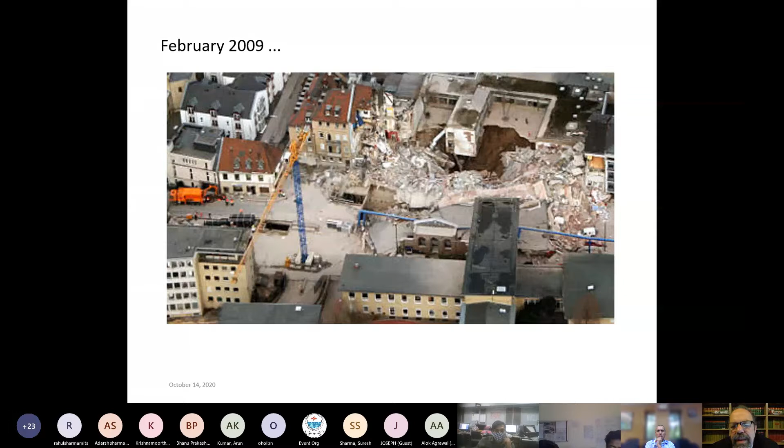It goes terribly wrong. And do not think and do not believe and never be even half persuaded to think that it only occurs in particular countries or somewhere else. It occurs everywhere. This is an image from Germany, February 2009. People died here, collapse. This is in Cologne. I'm not sure if any of you have been to Cologne, a beautiful city, and collapse.

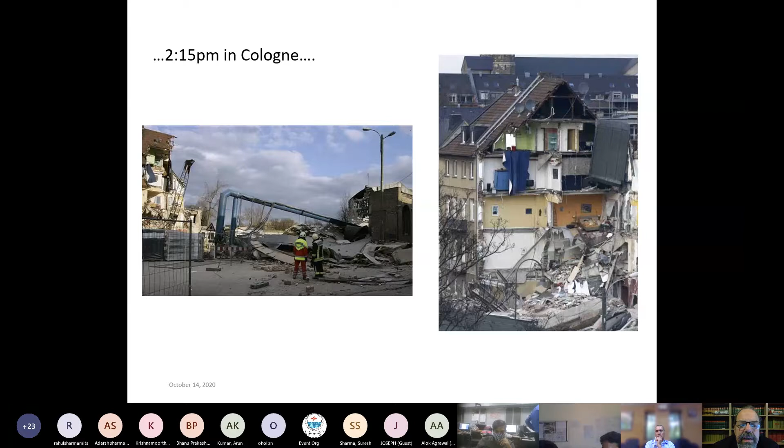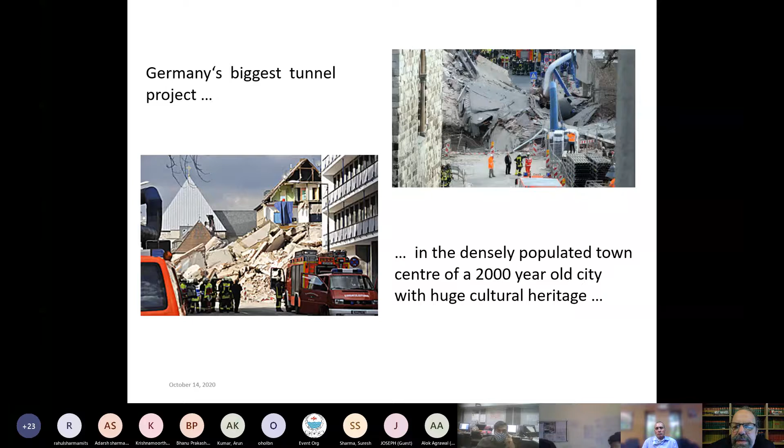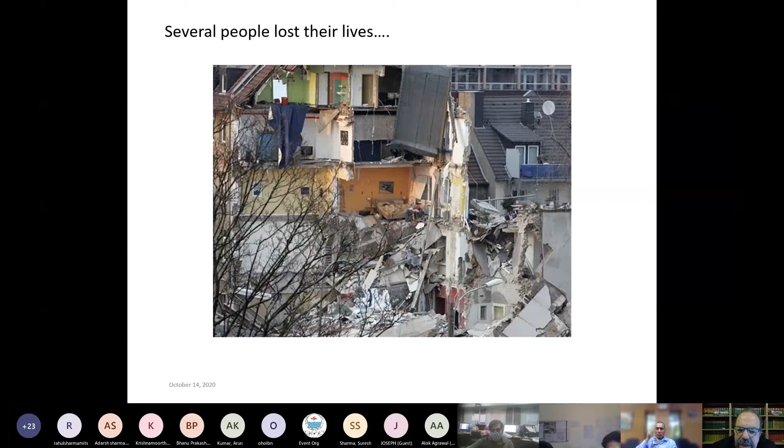It was Germany's biggest tunnel project. And in the middle of the city, in the most special part of the city, with huge cultural heritage, it collapsed and killed a whole lot of people. And this is just some images showing the houses ripped in half. This is in Germany. I'm not sure what your experience is when working with German companies or German people, but you could be forgiven, or at least I could be forgiven, for thinking nothing bad happened there. It happens everywhere. Predicting the future is no easy task.

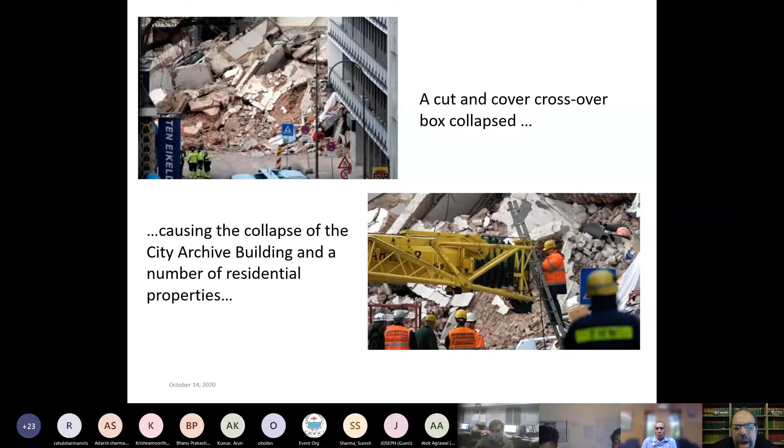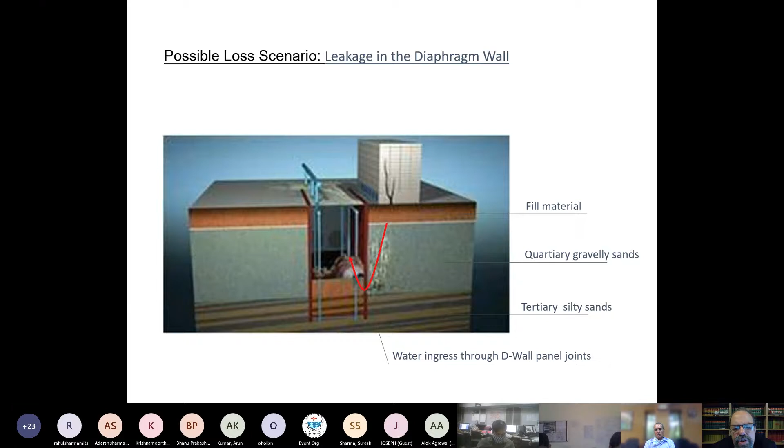It was just a cut and cover crossover box that collapsed. The collapse of this particular comparatively simple structure caused, of course, the collapse of the buildings above. And what was the reason for the collapse? Well, for those of you who work in the field, usually somehow involved, not always, given you've got the Himalayas in your country, you get some other big forces as well, but often, water and silt, some sort of discontinuity issue in the rock mass, some sort of dissolution process, whatever it might be, caught them out here in Germany, causing everything to collapse.

It's one of the biggest liability losses in the history of Germany at around 90 million euros. And the client, the company - here's another important message - the client had a 30-year plus loss-free track record. They were a top-tier grade A company, Germany's top civil contractors.

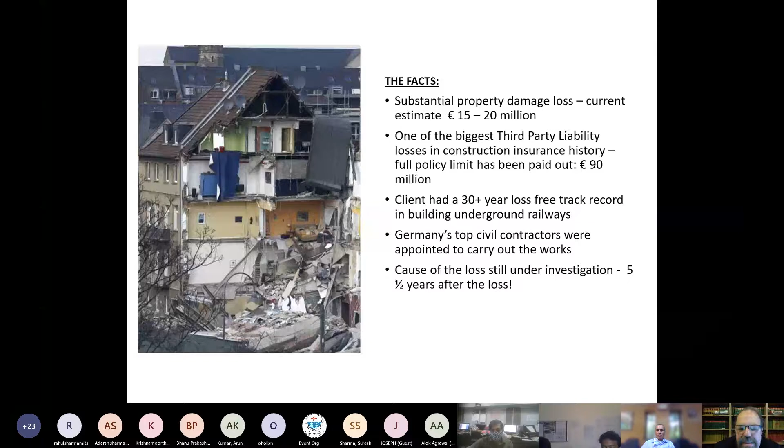My point is, it can happen to anyone. This predicting the future, this doing our job as engineers, discharging our special skills, understanding the risks and managing them - it's predicting the future, and it's not easy. Never easy. Just because it worked yesterday doesn't mean it's going to work tomorrow.

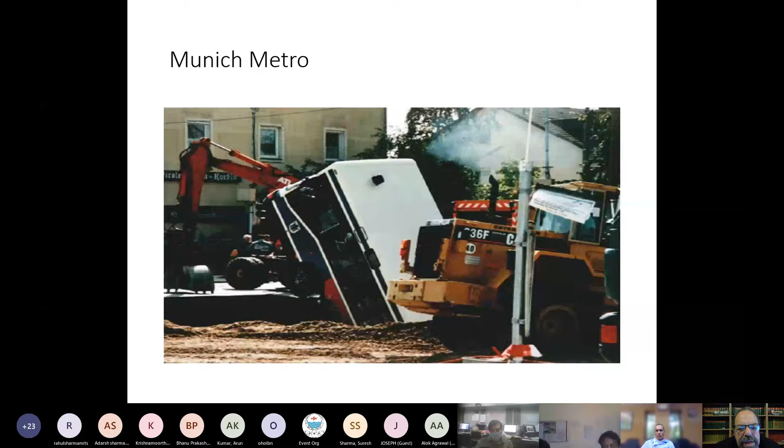Here's another one in Munich. Or in Cologne - another collapse in Germany. Not easy. Across to the United Kingdom with the Heathrow Airport collapse. Again, our colonial masters in the United Kingdom - you could be forgiven when you talk to them, you'd imagine that everything they do is perfect. Newsflash, it's not. Just like us, no matter where we are in the world, our job is hard because we're predicting the future. We've got limited resources. We have to deliver the projects. The risks are complex. We can only do our best, and we're only human.

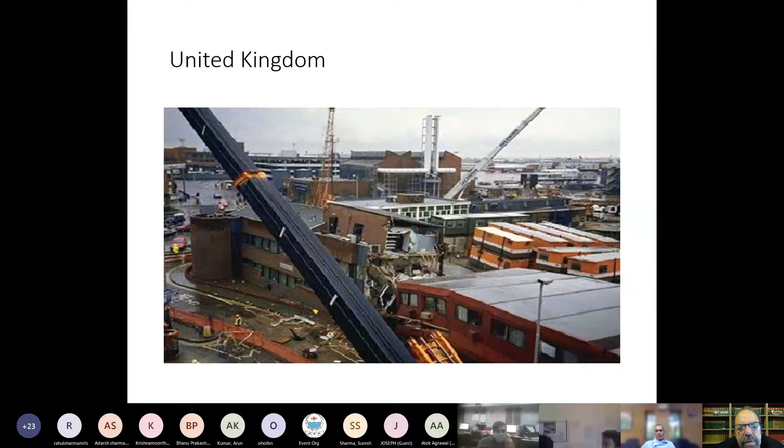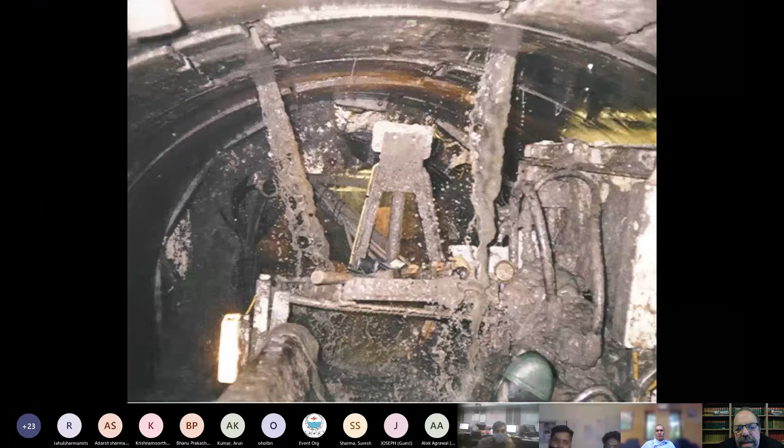My point is, it happens everywhere. South Korea, China.

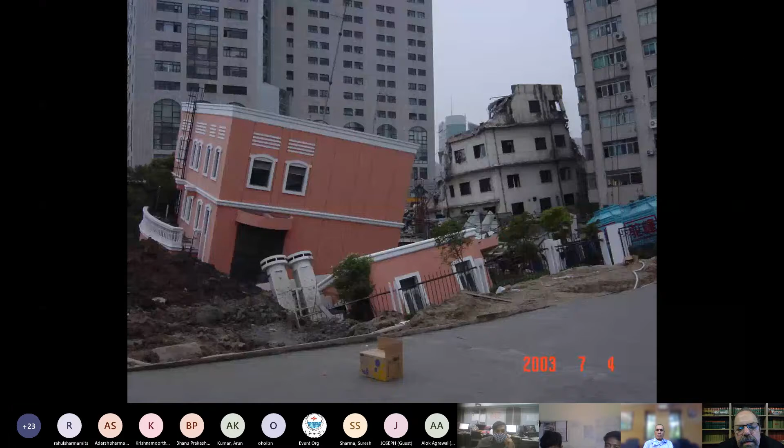Okay, so that's all very nice. That stuff's all in the public domain. And by this stage, you're either interested or you're not interested. You might be thinking, I'm not really interested. If you're not interested, listen a little closer, because you should be interested. And the fact that you're online tells me that you're a professional. I'm trying to tell you about the fallibility of us as people, as engineers doing our job. I'm trying to share with you how things can go wrong so easily.

And it's important to me to share it because I investigate disasters. Let me share with you a real disaster - no names, no dates, but a real disaster.

So here's my investigation team, and I have two secret weapons in this investigation team. I have two women. Now, why do I have two women in my investigation team? I have two women because I need information, and I need information from men. Often I find that men are less scared of talking to women, and women have a better manner about them to talk to men who, for example, have been seriously hurt, or someone's just been killed or whatever. I really, really appreciate the manner of a woman. If that's sexist, I stand accused, I'm sorry, but it's been my experience in investigation.

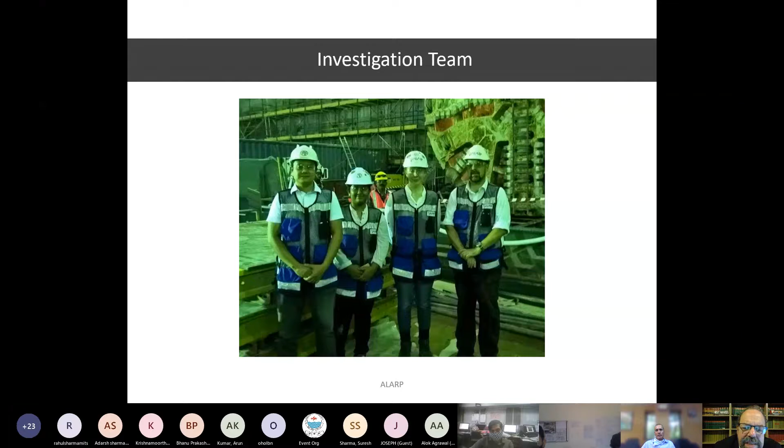So I've also got different nationalities in my team so that I can be culturally sensitive. Why would I do that? My friends, ladies and gentlemen, the people who are often doing the hardest and highest risk work in our projects throughout the world are often not from the countries in which you're working. And so in this particular case, which I can't mention where it is, I was dealing with miners from Bangladesh, from India, from the Philippines, and from Africa. And so I had to be sensitive to the cultural aspects when talking to them.

When I'm investigating death - never in our professional context, never, ever, ever have I found that someone has intended to kill somebody else. So I'm speaking to you now, it's like a lawyer - I'm a lawyer unplugged, okay? When I'm doing an investigation, I know there's a couple of exceptions where someone's done something bad and they've been killed in a tunnel, like having a piece of equipment squash them against the wall or something like that. But that's not what I'm talking about. I'm talking catastrophic failure in an underground context.

It's never intentional. So if it's not intentional, what is it that I'm looking for? I'm looking carefully for the evidence of the professional conduct. I'm looking for who did what and why. I'm trying to find out who's the boss and who's doing what they're told. Because newsflash number two: mostly the sort of people that are doing the construction work here will do exactly what they're told because they're desperate for work. And in my experience, the responsibility tends to lie with the supervisors and the engineers above them.

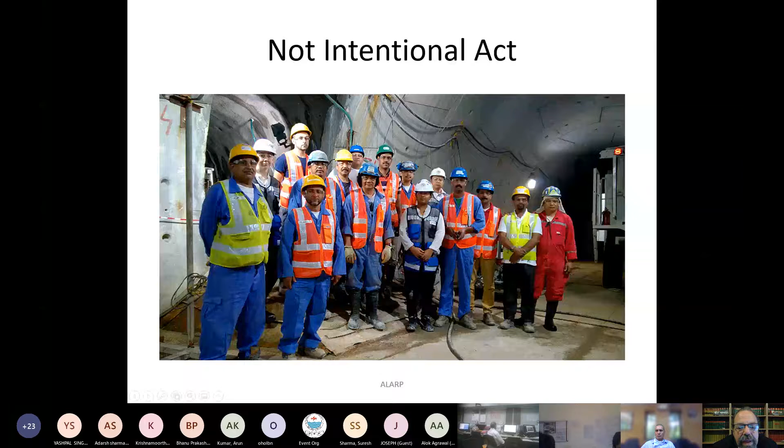When I'm investigating, one of the first things I do is try and find out how this particular construction was meant to be undertaken. The method statement, call it whatever you like in whatever country you're in. I'm assuming that for each of you listening, if you haven't worked in other countries, you will one day, and the words might change, but inevitably there'll be a document, a piece of paper, something which defines how a job should actually be done.

When I investigated this disaster, remember this isn't theoretical, what I'm telling you about is real. This isn't some hypothetical from a university exam, this is the real deal. When I investigated this particular incident that resulted in deaths, the method statement contemplated bad ground. It contemplated injection grouting, it contemplated rock bolts, and it contemplated 1 metre excavation drives.

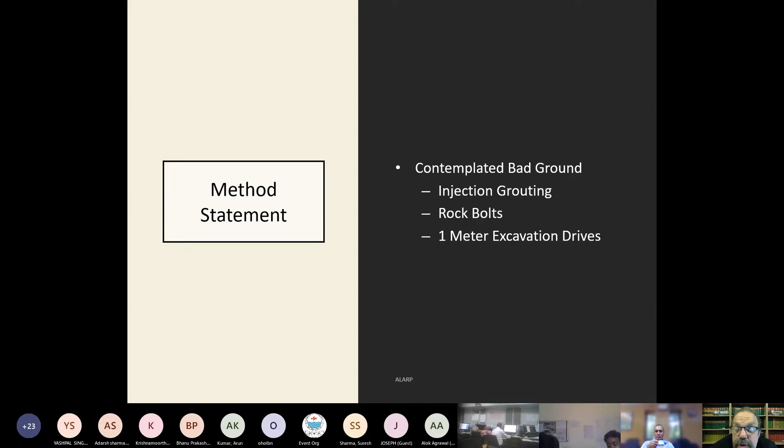So as part of my investigation with my lawyer's hat on, investigating a real disaster, I now had in one hand a message from the engineers who were responsible for drawing the method statement, presumably the design engineers somewhere behind them. And there were key risk management procedures as well.

In the method statement, so in the documentation that was defining how to build this tunnel, in relation to this, which was cross passages, my favourite, I love cross passages because they're so much more difficult than the main drives. The method statement for the cross passages talked about temporary support, and it said specifically, during excavation, access of workers below unsupported rock is strictly forbidden. That's what the paperwork says.

I'll say it again. In the paperwork that has come down the chain of command from the designers, in the paperwork which is based upon the geotechnical investigation, plus the findings from other tunnels, the other drives as they've gone past this location - this is revision 4 - during excavation, access of workers below unsupported rock is strictly forbidden.

It's a message from the engineers about foreseeing the future. It's a message about the future where they're anticipating something going wrong and the potential for injury. The future was partly foreseen. They knew this was dangerous. The ground in this particular location, the designers knew was poor.

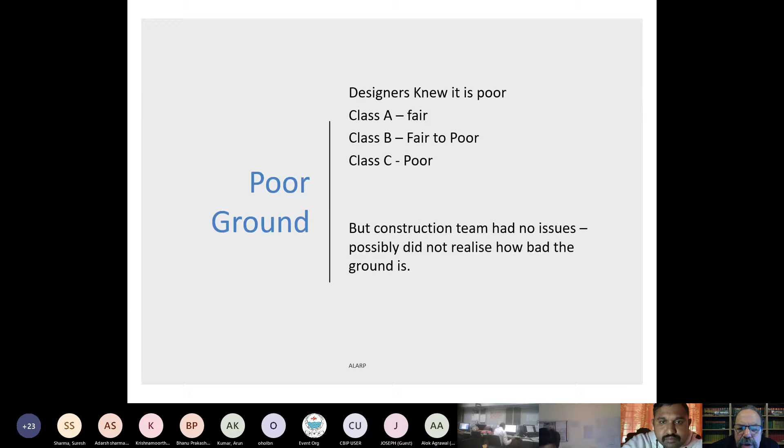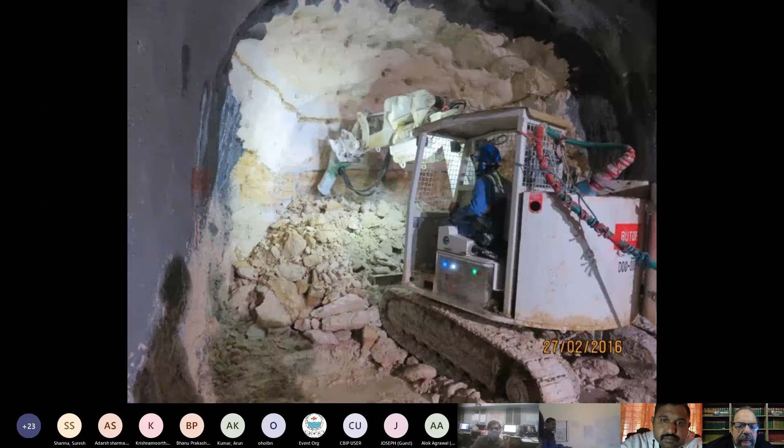Here's another picture of the excavation, showing workers excavating, doing a drive, and then they'll put in the support. Nothing remarkable about that, except you see how this layer, if you go back to your geology, the bedding of that is almost parallel to, entirely horizontal with, this drive. It's running exactly along the line of this cross passage. It couldn't be in any worse position if there was such a discontinuity immediately above the crown.

It's called coffin cover in the trade, coffin cover, because they say the lid of your coffin is just sitting above you.

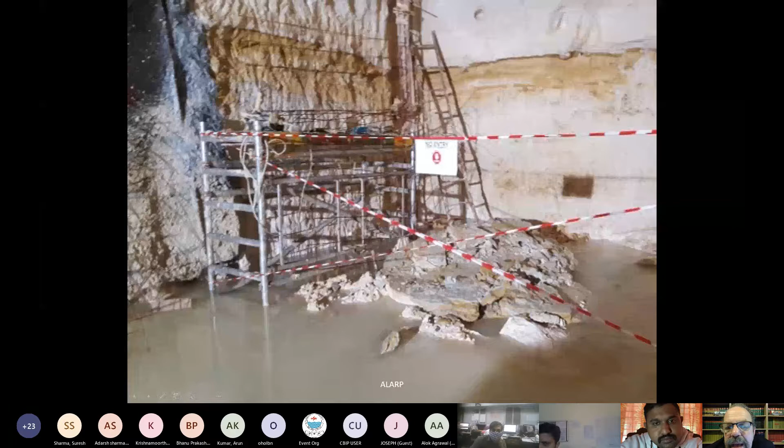And then it collapsed. In this photograph, what you can see is the roof that collapsed. The very, very fine layer of discontinuity here on top of this rather planar surface. And the people who were killed were underneath this. It's just that simple.

Rule number 5: our heads don't do well even with a small rock. We're not very strong. We're not built to have big rocks fall on us, and you just die if you're lucky.

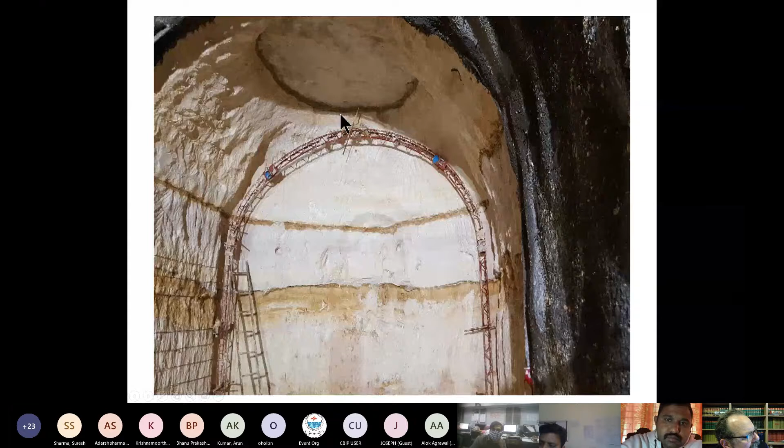And now, when we look up, there's the coffin cover. That little thin line is the bedding plane for a similar discontinuity in the rock, which is just running along the crown. That whole section of roof has just fallen out as one piece and killed the people who were working below.

And there's further evidence here about what happened. If we look carefully, here's some evidence. In the method statement, it was meant to be a 1 metre drive and then put in the support. But look, it's more than 1 metre. You can see the lattice girder here that's being put in place.

You're not meant to put the lattice girder at the end and work your way back. You're meant to put the lattice girder near where you've already provided the support, and work your way in. Why? So this doesn't happen, so you don't have the roof fall on your head and kill you.

This underground prediction of the future is a serious matter. Yet for me as an investigator, I know that the designer knew. I know that the method statement contemplated it, but there's a disconnection right here. At the cross passage, people like you, like me, could have been any one of us, for whatever reason, we weren't prepared to do our job properly and actually follow the procedure that we meant to.

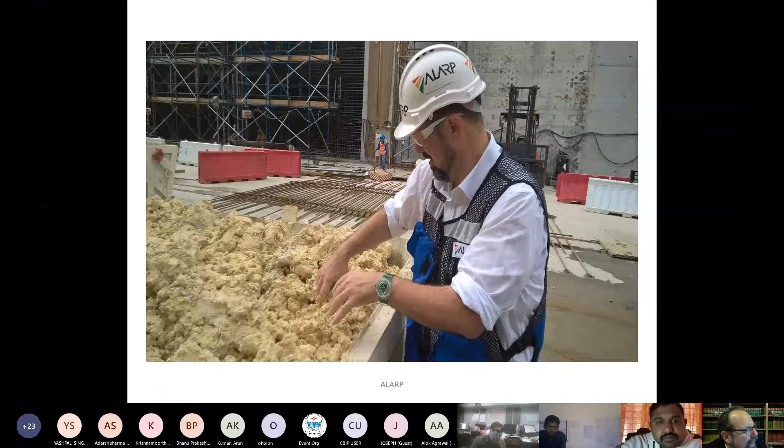And I engaged with the design team, and the design team flew in, and they were terrific. As I mentioned before, the design team knew exactly why the method statement was as it was. The design team contemplated bad ground, but the translation of that method statement into how the actual works were conducted was perverted because of the speed.

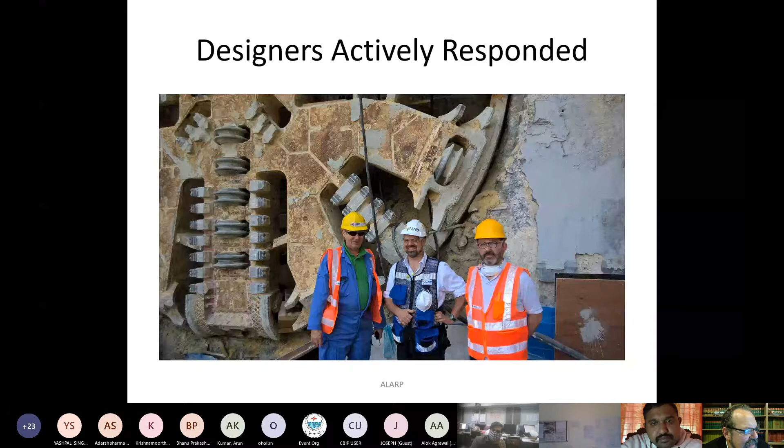I also went and looked at other sections of the completed tunnel for evidence about groundwater ingress - anything like a forensic investigation. I wasn't just content to look in the cross passage. I wanted to understand the context. I wanted to understand the ground disturbances the TBMs had passed on either side of this particular location of the deaths. I wanted to understand what knowledge had been gained when the TBMs passed and how that knowledge had been used.

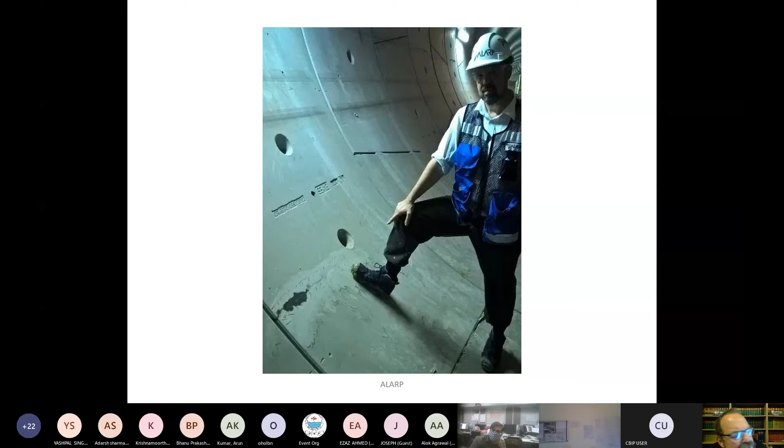And I also wanted to understand the miners. I wanted to understand their state of mind - what are these people like? Generally miners, in my experience, are risk averse, but they do what they're told because they've got to feed their family.

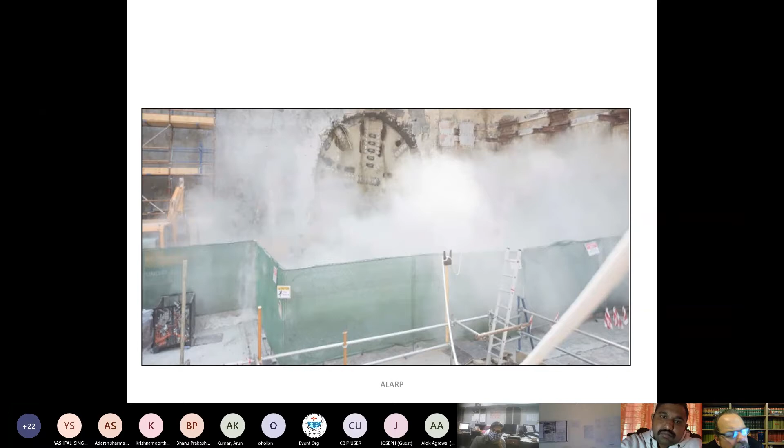And I also went and investigated other things. I just wanted to understand what entirely was going on, not just what might be investigated from a textbook. I discovered something interesting - that at almost exactly the time the roof collapsed, there was a breakthrough at a station box just a few hundred meters away. Now why is that important? My friends, as technical people, if you've ever been to a tunnel breakthrough, have you ever felt the boom? Have you ever felt the ground move when that big face of rock falls off?

Lesson number 6: do not underestimate the power of your eyes, your ears, and every other sense God has given you. It's nice to have a tertiary education, but be wide open to information of whatever sort and be prepared to think laterally. My friends, here is a potential trigger - in substance, a seismic trigger - for an event down in that cross passage. And when I linked up the times of the collapse with the time of this breakthrough, they aligned.

But I did more. I got up on top of buildings and looked down upon the site, looked down upon the area. The actual deaths occurred somewhere down under here. And I just wanted to have a look at what was above. Now why would I do that?

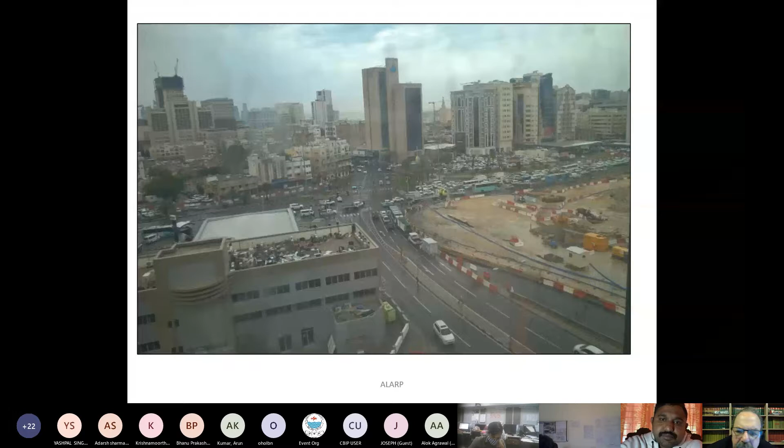And what did I find when I looked down from above? I found another TBM. So not only have I found, coincident with the falling of the roof killing the people, the breakthrough in the station box - I also discovered another little TBM, nothing to do with the metro in which the collapse occurred.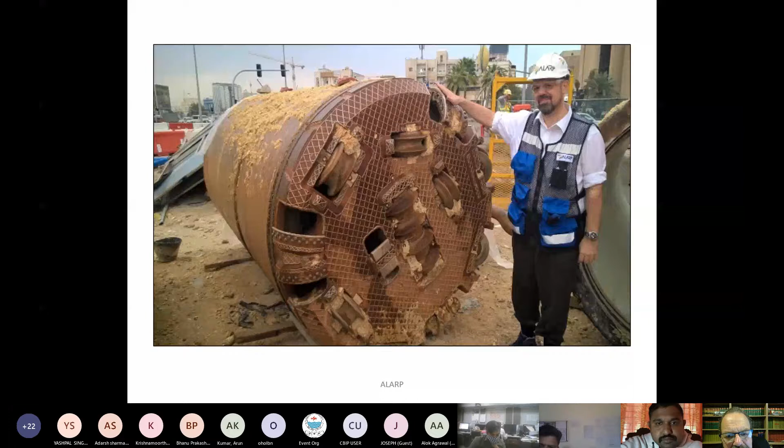And so then I tried to work out the comparative alignments between the metro, the cross passages, and this little TBM that went across here. And it turned out, as luck would have it, that at about exactly the same time there was a tunnel breakthrough in the station box, and at exactly the same time the roof collapsed, a little tunnel boring machine was crossing over the alignment of the cross passage and the main metro tunnels.

So I've got, on the one hand, just a simple method statement, but now what I'm discovering is a lack of coordination between a whole lot of different activity. I've got a completely different company doing a completely different project with a completely different TBM right above my cross passage. I've got a breakthrough in a station box just a few hundred meters away. I've got disturbed ground because I've had a tunnel boring machine do two passes - one pass for one tunnel, one for the other.

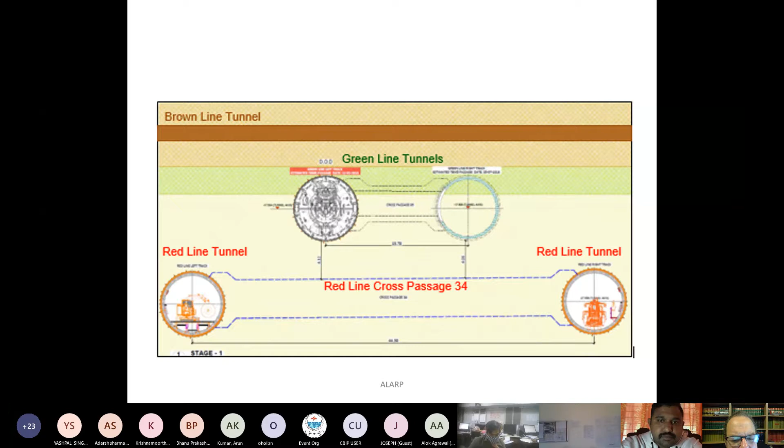As engineers, as professional people, as citizens, as decent human beings, our duty to predict the future is more than just out of a textbook. You have to be open to context, eyes open, ears open. You see the convergence of events which is occurring.

Here's one of my team talking to one of the people who wasn't killed, and coincidentally both Indian, and they were able to communicate in Hindi. The local languages were different, but they used Hindi. This particular man only told my engineer Dina what was going on, I think, because of her gentle approach with him. He was so scared, so scared that he was going to lose his job.

And what was he telling her? He was telling her that he just did what he was told. He was telling her that other people had been injured, but that they'd been taken away and hidden because they didn't want to get into trouble. He was telling her everything, and he was just happy to tell her that story.

Just as a little aside, notice there's no textbook, no pen, no piece of paper. My friends, in the end, we're people. Do not underestimate the importance of just being a decent human being when talking to another. Yes, we're engineers, yes we're technical people, but this man had lost colleagues and friends who'd been killed and was terribly scared. Just talking, making them feel comfortable is enormously valuable.

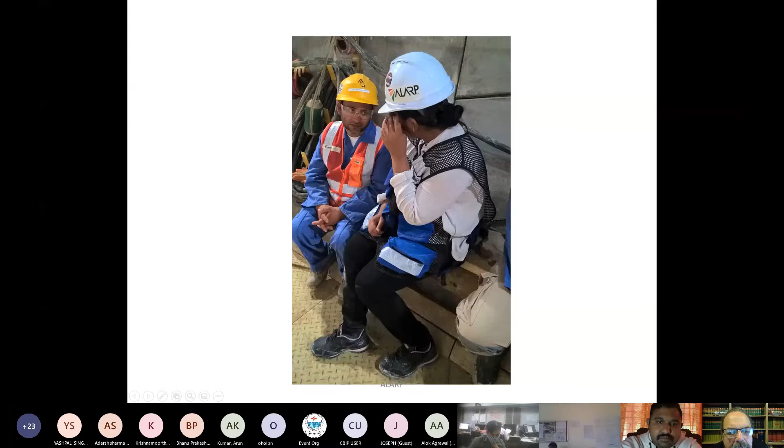So what do I do? I head off to the core shed because I've got a few ideas now about what's going on. I get the cores, which were taken very close to where this cross passage collapsed. And what do I find? I find another thin layer of incompetent material exactly above the crown of the cross passage.

I'm going to change my numbering system now. Lesson A: geotech information should be used. The project knew that there was a weak layer immediately above the crown of this tunnel. It just never got communicated down the line.

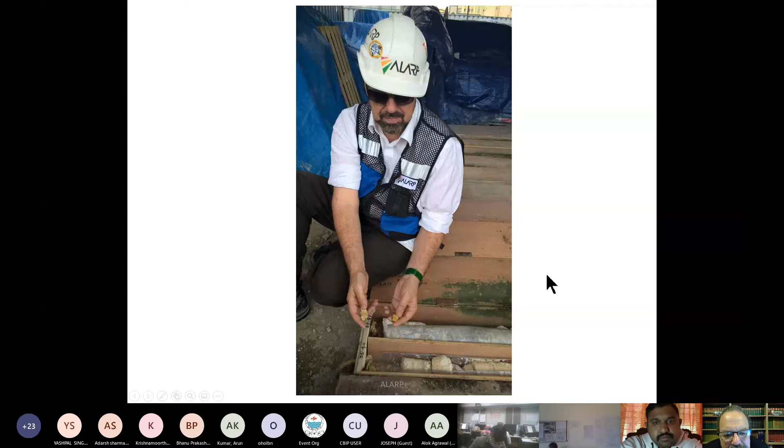And this is me looking at the evidence of it. I found it was open to anyone to find. It's not because I'm a genius. I just had a look.

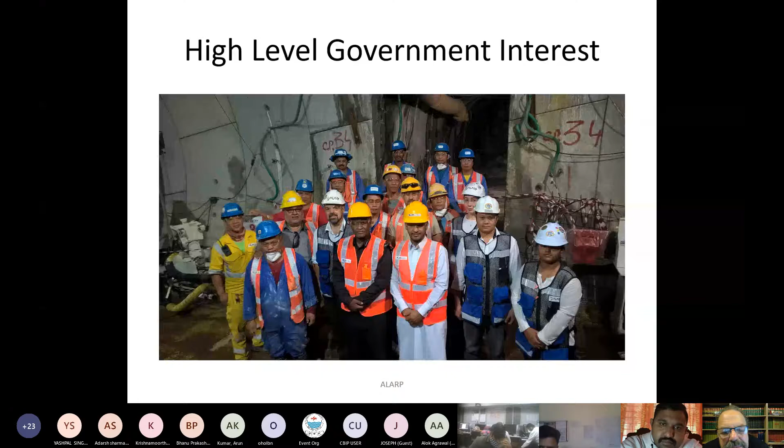Of course, these sorts of events create a whole lot of government interest. And again, if you're working overseas, do not underestimate when something happens and people are killed. You've got the very real chance of ending up in prison. So this is a very serious matter, and this is just part of the investigation team, the government, what have you, doing the investigation. We do lots of inspections and all those sorts of sensible things.

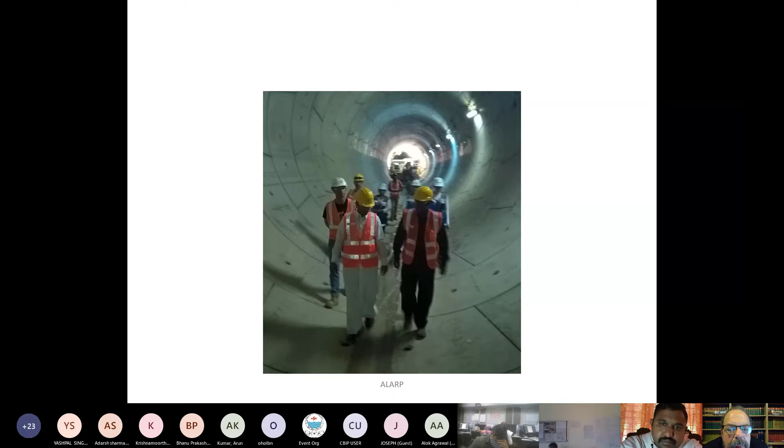The records. When I examine the records, I find this. I find that the project knew about the weathered nature of the rock, and the project knew about the weakness, and it was all documented. And that's why the method statement seemed conservative. To the people in the field, the 1 metre drive seemed outrageously conservative. But it was correct, because the rock was so bad, even though it was called Class A, B and C.

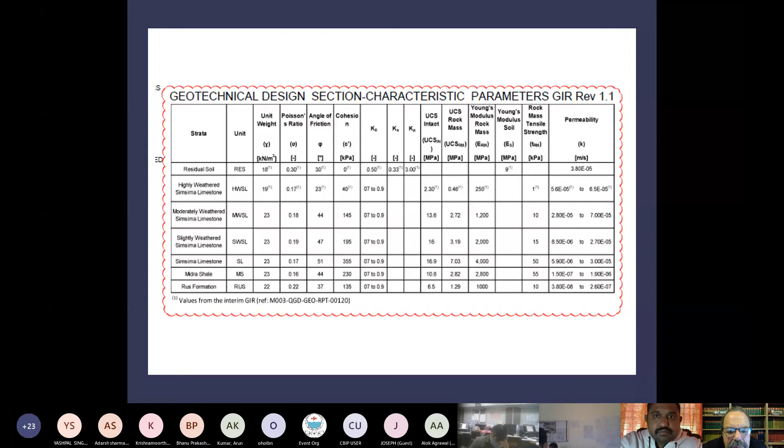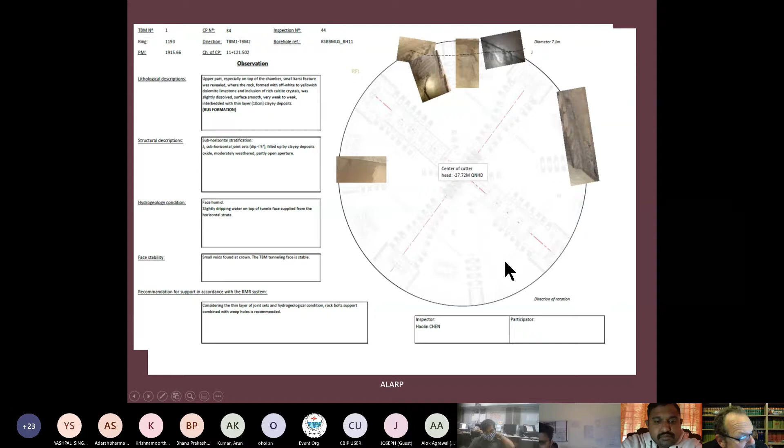When I looked deeper into the reports from the design team, they had words like, considering the thin layer of joint sets and hydrogeological condition, rock bolt support combined with weep holes is recommended. They knew that this was difficult ground conditions. The cross passage had no special instructions for the team.

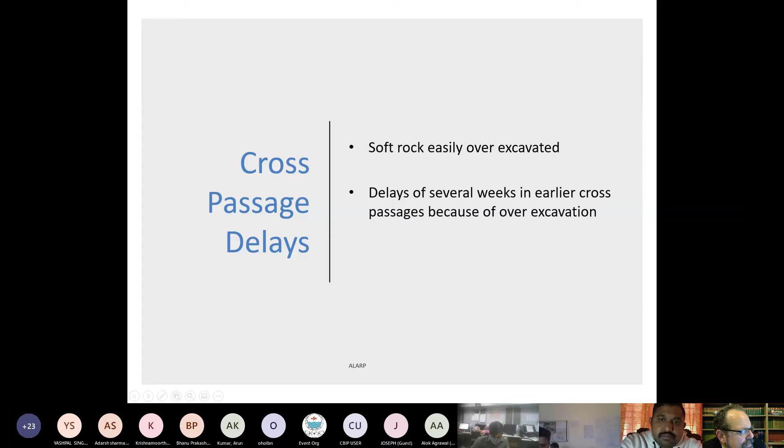We know, and I'm sure you know from your work as well, that soft rock is easily over-excavated, and from a stability point of view, over-excavation's a bad thing. We want those nice arches, we want nice, neat cross passages. And there was a lot of pressure in this project to get things done because of over-excavation and the complexities that it caused. And this is just another close-up of some of the rock.

So in this investigation, what I found was the project had imposed absolute prohibition on working under unsupported rock. Clearly, the designers had made it clear, do not work under unsupported rock. The method statements contemplated poor quality rock and localised rock bolting, grouting, lattice girders, water, hydrogeological relief, what have you.

The local cross passage team were overconfident and under-expert. Overconfident, under-expert. The poor quality of the rock wasn't understood by the cross passage team. They weren't wise. The miners knew because they're miners, but the supervisors who were directing them were not experienced in underground construction.

Production rates were overwhelmed and overwhelming the method statements. There was such a drive for production that the method statements were being ignored. And the wet weak rock above the crown wasn't communicated, even though it was identified in the logs, even though it was identified during the intervention in the tunnel boring machine. My conclusion was that the procedures were not followed on purpose.

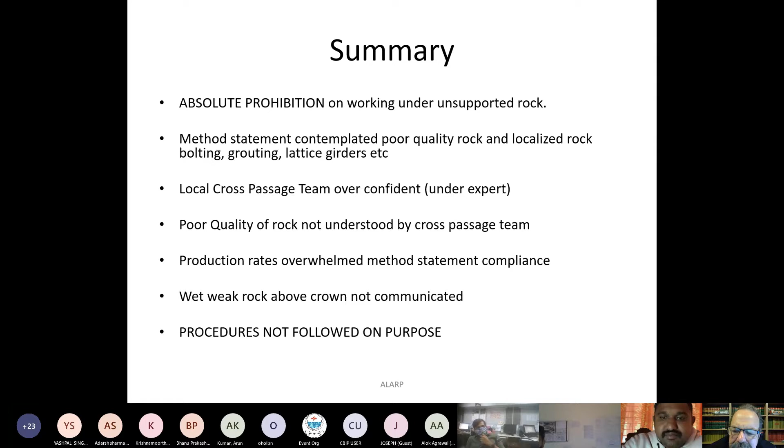Please be professional. You can't predict the future. I get that. I understand that. You can't. But you can do your job properly. You can be professional. You can discharge your obligations responsibly. That part you can do.

The stability of the overall tunnels generally was confused with localized stability. That is, the stability in that very, very localized location was confused with overall stability. And criticism of the cross-passage team, and there was criticism, this is of the senior people, was rejected wrongly on the basis of cultural bias. And if you're involved in an international project, you'll see this all the time. For those of you who've worked overseas, it's disgusting, but it's just how it works.

You have a whole lot of nationalities and they play a game of paper, scissors, rock, and it depends which passport you've got, who rules. Not what's right, who's right. And it kills people, because what's right's what's right. It doesn't matter what passport you got. It's what's right. That's what science is all about. That's what engineering is all about. It's not about passports. It's about what's right.

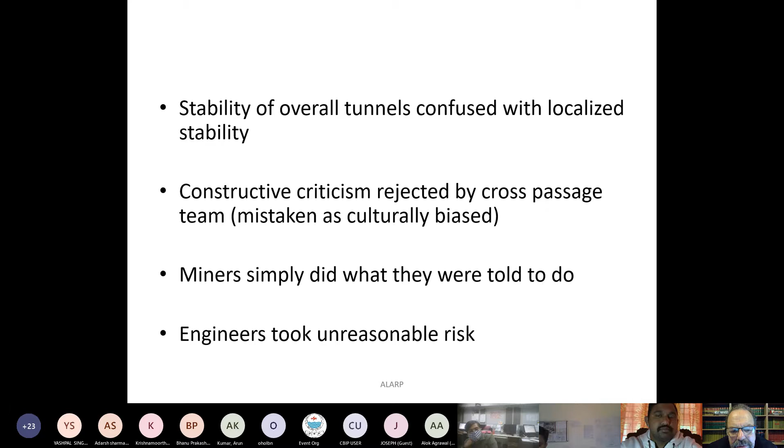And the miners simply did what they were told to do. And the engineers took unreasonable risk. And the project was pushing on just too fast and too hard. And the method statements weren't being revised or even followed. So what does that all mean? Well, it means if you cheat, if you don't do your job properly as engineers, if we don't discharge our responsibilities as professionals, we kill people. And it's bad engineering.

You can't manage risks if you don't understand them. That's our job. That's why we're professionals. We can't see the future, but we can have a really, really good crack at managing it as long as we're true to our profession and we're intellectually true. And this fascination with always going faster, it's okay. It's okay to go faster if you understand what you're doing. You could go faster if you change the method statement. You can't go faster just by ignoring the method statement.

The wisdom is what we bring to the projects as engineers and professionals. The wisdom, it's the essence of what we do. That's the lesson. There is no shortcut to this. We can't predict the future. We can at best manage the risk. We cannot predict the future, but please do not be that person who forgot what they are trained to do, who forgot to look after their fellow man, who forgot the importance of the engineering and science. Don't be that person.